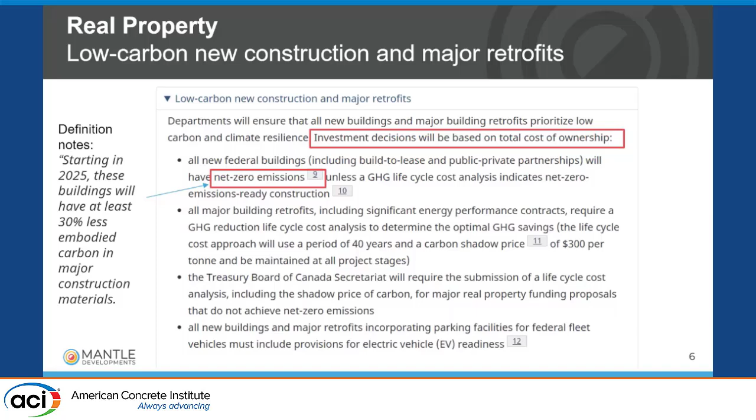And it does have a whole list of green procurement topics, including leased facilities, water, construction, waste, biodiversity. So it's a broad sustainability procurement mandate, but we'll be digging into the specific one, buy clean, low carbon construction. That's where the main policy here lives. Before we get into that one, just to touch on some of the broader ones, the new construction and major retrofits is more around operational energy, but they do have some notes in there about net zero emissions as a goal for construction. And if you dig down into the definition of that, they do actually define net zero emissions as also having a 30% reduction in embodied carbon. So this is sprinkled throughout the policy.

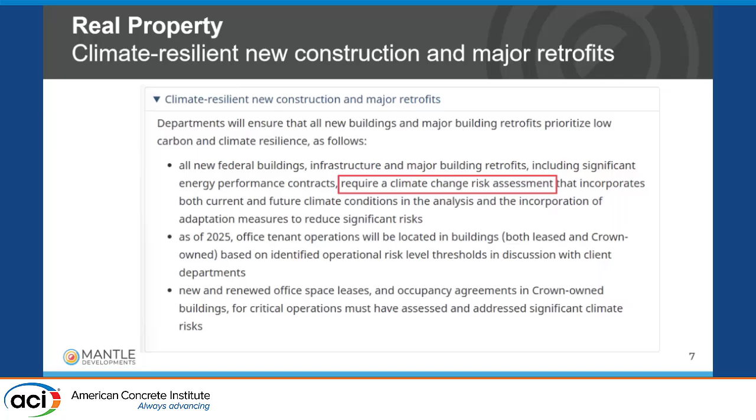One thing that is relevant, I think, to the concrete industry specifically is there are also climate resilience requirements in these policies. So all these new construction projects are supposed to do a climate change risk assessment and understand climate risks and how the buildings and infrastructure can be more resilient. So concrete obviously is a key material for building resilience.

So to dig into the specific real property buy clean construction here, when this launched in 2017, the first bullet was the active one, which was basically to disclose the embodied carbon in the buildings and infrastructure. So it was just a reporting mandate. So folks had to understand the carbon footprint of their projects and report it. But now the bottom two bullets came into effect in 2025. So these are new, but you can see the one highlighted in red here is basically saying that these construction projects should have a 30% reduction in their embodied carbon.

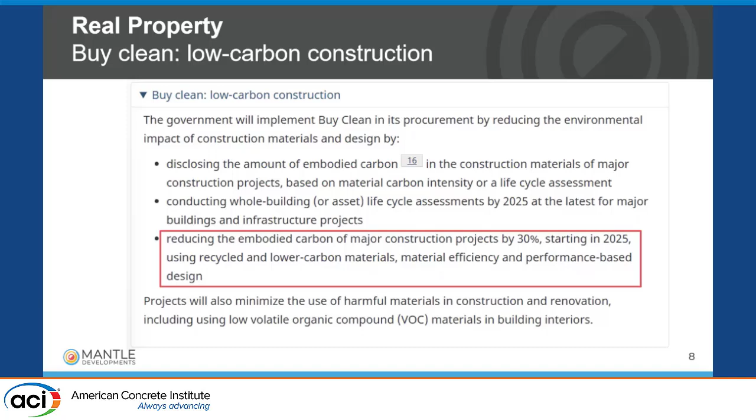So project teams are responsible for creating a baseline of what a typical project, using industry average materials, what the carbon footprint would be of that, and then making sure that they actually have lower carbon procurement and design strategies to reduce the embodied carbon by about 30%. So that's the general overarching policy, but we have a more specific standard that has been developed to help achieve that, which is called the Standard on Embodied Carbon in Construction.

This came into effect at the start of 2023, and it basically requires project teams, again, under all federal government construction projects, buildings and infrastructure, to disclose and reduce the embodied carbon of construction projects. And the main meat of the requirement is here on this final line. You need to show that your project is 10% less, and actually it's only applicable to ready-mix concrete at the moment. So the summary of the policy is your ready-mix concrete on the project has to be 10% below the industry

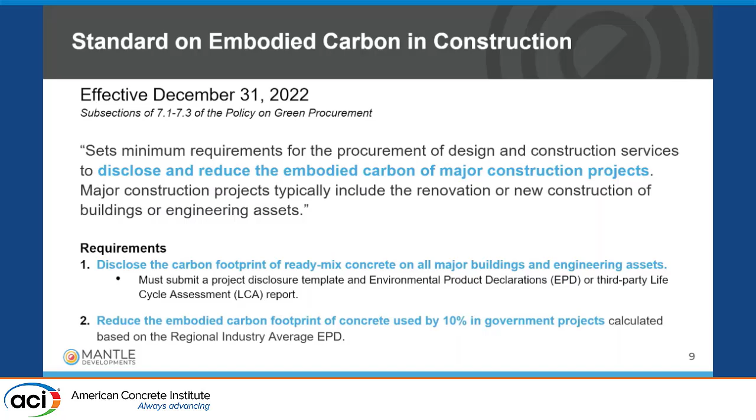average benchmark. So to do this, you're supposed to provide EPDs, environmental product declarations, to show the carbon of your actual mixes used on the project, and then demonstrate that that's 10% below a baseline. So this is what the policy looks like. You can just Google it and it'll pop up on the web. One of the interesting things to point out here is that the appendix is where the specifics live in terms of what materials are covered and the percentage reduction requirements.

And they did this very specifically because it's very easy for them to update appendices. It's very difficult from a policy perspective to update an entire policy. So they did this on purpose so that they could add more materials easily by just updating the appendix. So this was designed from the start to in the future have many different materials in it, but currently we're only at ready-mix concrete. So we're expecting to see many evolutions of this over time.

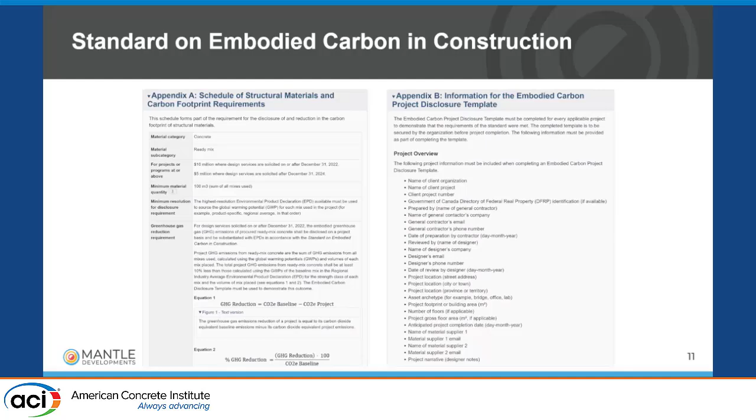So just some of the key things to point out here. It applies to all projects that are over $5 million. Initially, before 2025, it applied to all projects over $10 million. So they started at the more expensive projects, and now they've ratcheted it down to $5 million and up. So it's applying to more projects over time.

And then also, the project has to have at least 100 cubic meters of ready-mix concrete on the project. So if it has less than that, then the policy doesn't apply. And as I said, additional materials are expected to be added in the future. We're expecting structural steel to be the next one.

The government has undergone extensive industry collaboration and information gathering about adding steel to the standard. So we know quite a lot of engagement has gone on around steel. So it's no secret that steel's coming. We just don't know exactly when that's going to be implemented.

We currently have tariffs on the steel industry in Canada, so they might not be wanting to go quickly in adding additional requirements on the industry, but hopefully when the trade gets back to normal, they'll probably be implementing those requirements. And then we should probably expect to see other forms of concrete, like precast, to be added. Unclear when that might happen.

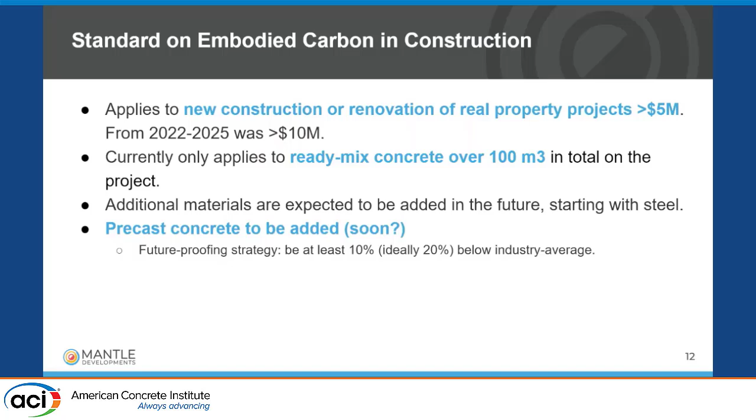So when I talk to other industries and precast developers, I always say, as a future-proofing strategy, you should be getting ahead of this policy and making sure that your product is at least 10% below the industry average, right? Because that's what this current policy requires. So even if this isn't required for you right now, if it comes into place and you're above the 10%, then you're going to have to find ways to decarbonize pretty quick. So I think that's a good future-proofing approach before the policy comes in.

Some of the other interesting fine print things to point out is they have a note that if there's a special application requirement of concrete, they say high early strength, high or ultra high performance, or cold weather applications. Those are their specialty applications. They say in those cases you can increase your benchmark to 130%, so a 30% increase from the baseline. So they're allowing a higher carbon footprint for those specialty mixes.

They also have some language that allows projects to not have to follow the standard if it's a specialty project. So they say if the performance of the structure or structural material hinders the implementation of the requirement or the reduction, or if the material is not available in a given region, then the project doesn't have to comply with this.

And then also construction in the far north of Canada, in Yukon, Nunavut, and Northwest Territories, is not required to follow the standard because they were concerned that there may not be cost-effective sources of low-carbon concrete. So that's some of the fine print associated with the policy.

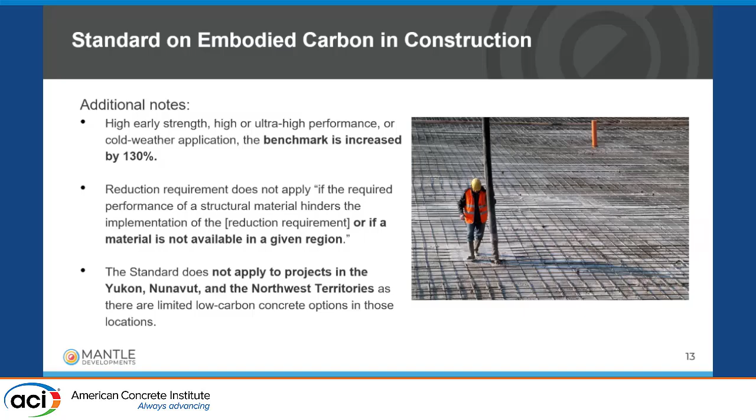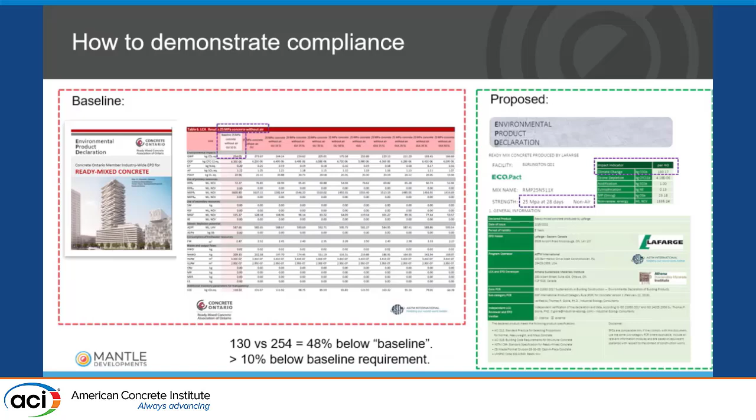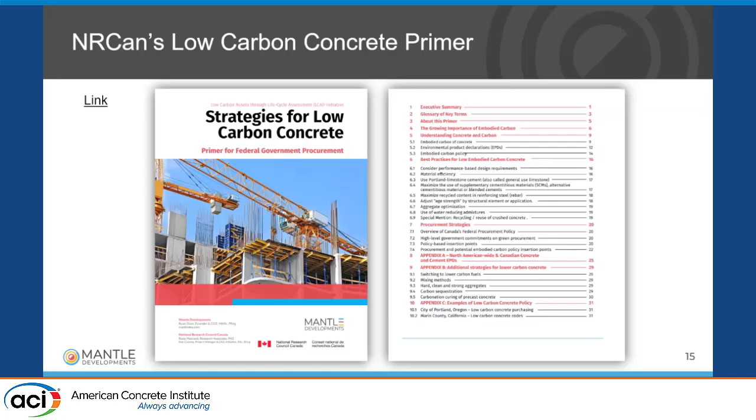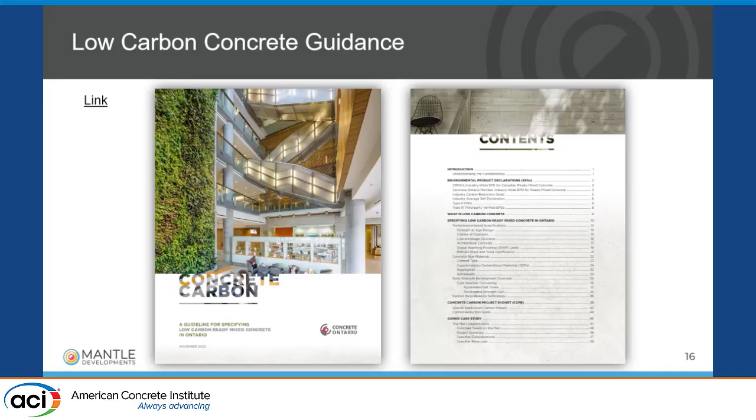And then also we had some really good industry-driven support documentation. This is from Concrete Ontario, where they created this guideline on how to actually specify low-carbon concrete for specific projects. So these documents were really made for a broad, non-technical audience, for procurement agents and policymakers to really understand and demystify what we're talking about when we say low-carbon concrete.

Wanted to also just close with this image in terms of what we're trying to achieve here. Some folks talked about carbon storage in concrete. I think that is kind of the holy grail future where we want to go, if and when we can: using our buildings and our construction projects not just to be less bad, but to be one of the solutions to climate change, a sink for the carbon. I think that's really where we need to go.

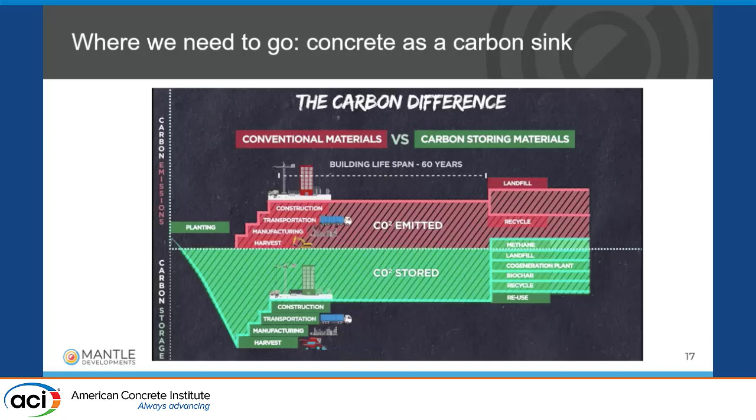I think I probably have a couple minutes left, so I don't have slides on this, but I'll share a little bit about the City of Toronto's embodied carbon policy. Or before that, maybe I'll mention the building code in Canada, because all of this I talked about is not for all construction in Canada, it's just for the federal government's construction, but we do have a plan to implement embodied carbon into the general building code for 2030, so it's a ways down the road still.

But the plan is for operational carbon to be added to the building code in the 2025 code cycle this year, but it'll probably take a few years to come into effect, and then embodied carbon in 2030. So that is on the radar for eventually getting into the building code for all construction.

In terms of the City of Toronto, we have a policy here called the Toronto Green Standard, which you need to meet in order to get a site plan approval to build. And it has an embodied carbon requirement at the building level, so not at the concrete mix level like this policy, but at the entire building. So you have to quantify the embodied carbon of your structure and envelope, and you basically divide it by your square footage. And if that number is above 350 kilograms of CO2 per meter squared, you don't get a site plan approval and you can't build.

So it's currently a voluntary tier 2 requirement for non-city buildings. So if the City of Toronto is building something, it has to meet that 350 threshold already. But for general construction, it's a voluntary stretch code or stretch target right now. And if you do that, then you get a financial incentive back. But that is expected to move from voluntary to a requirement next year in 2026.